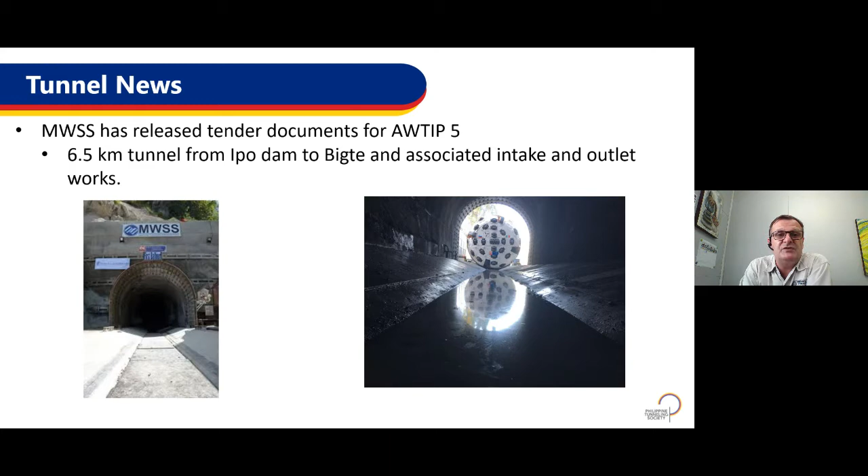So, tunnel news, I have three bits of news. This one is basically the same as last month. MWSS has released tender documents for AWTIP number 5, a 6.5 kilometer tunnel that connects Ipo Dam to Bigte Basin.

Also, there are a couple of phases to be done on the Mega Manila Metro subway project. This is basically the first subway project in the whole of Metro Manila, and the proponent is the Department of Transport. Phase 1 is already out for tender or has been awarded.

There are 4 packages there. The newly released package for tender is CP 104. In addition, there will be another 2 or 5 future packages. The information can be accessed publicly through the DOTR website.

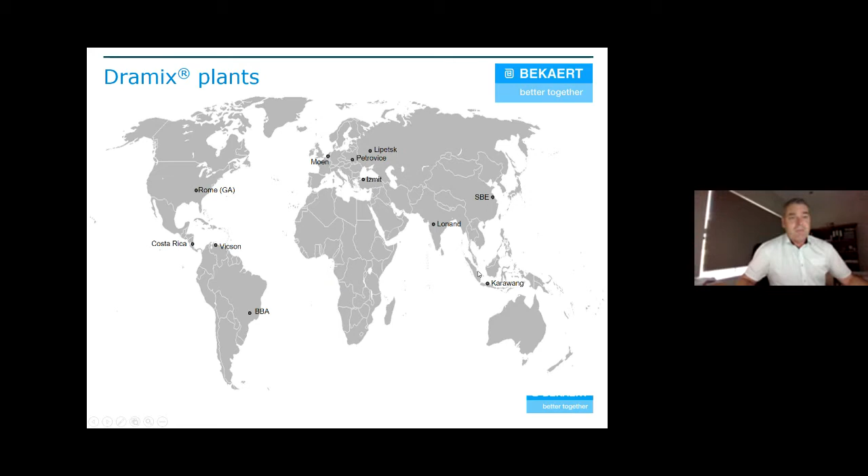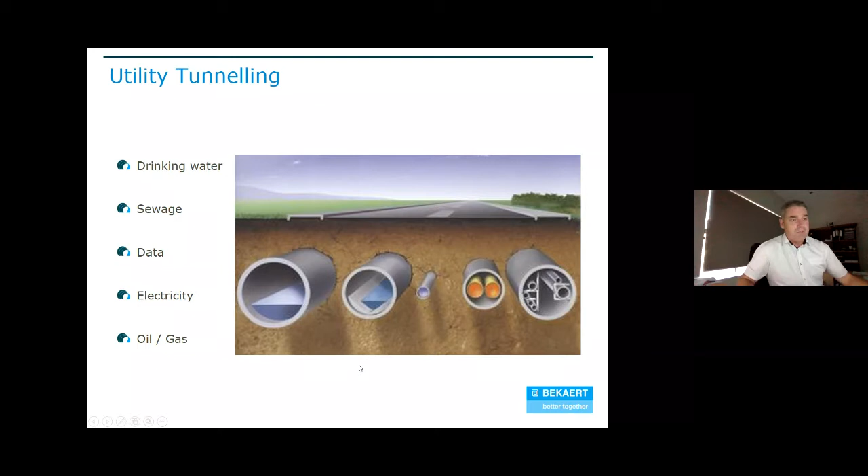I guess for the Philippines, it's basically seen as new technology, but in other parts of the world, especially Oceania, America and the UK, it's a very well-used product in drinking water, sewers, data centers, electrical, oil and gas - all now use fibre reinforced concrete. We also do roads, rails, and what we'll talk about today is metros.

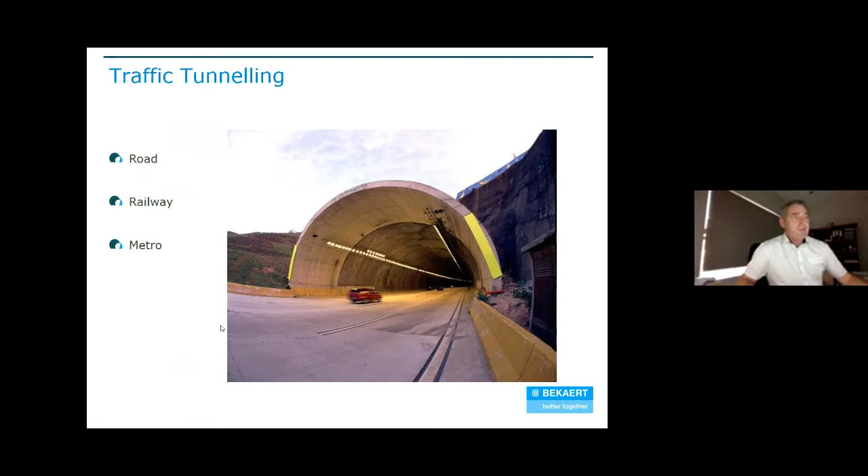Some of you may know there are many different types of fibres - plastic, steel, microfibres. I guess the important point to make is that there's no wrong fibre, just the right fibre for the right application.

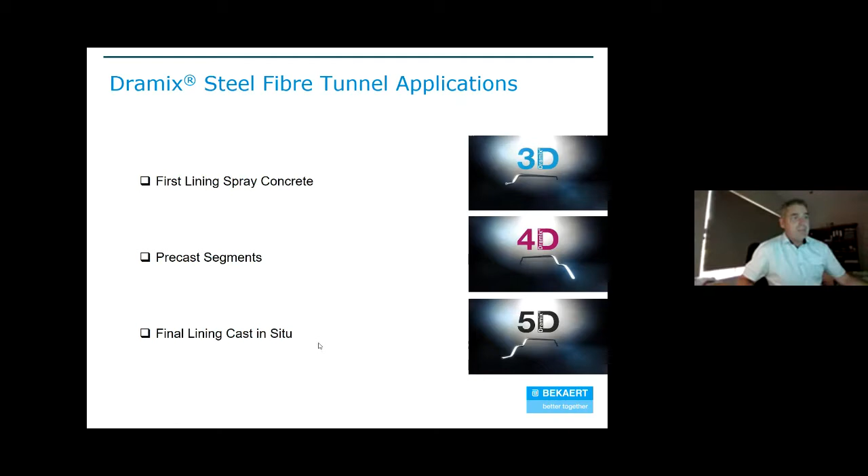For us, this is a little bit of our product range, and we'll talk more in general about the design of steel fibres later on with Gung. We have 3 types of different fibres: our 3D fibre range, our 4D, and our 5D ultra high tensile fibres. I just wanted to show a little video here which gives an understanding of our application and our product, and how it actually works in concrete.

So it's a quick little video.

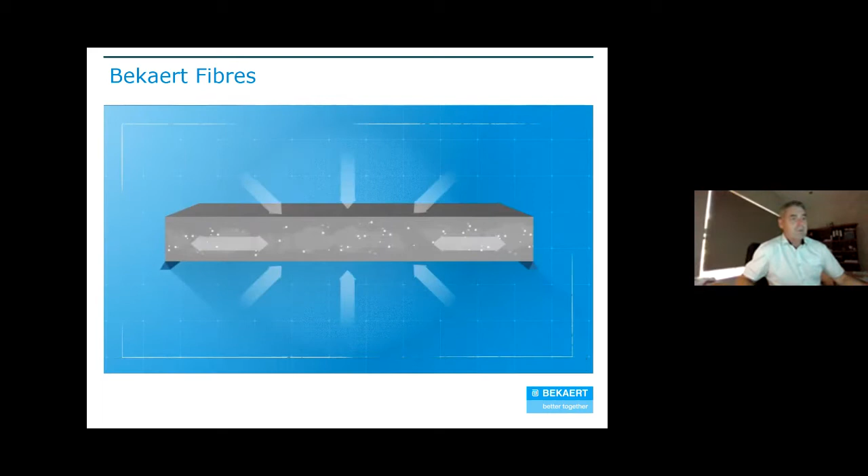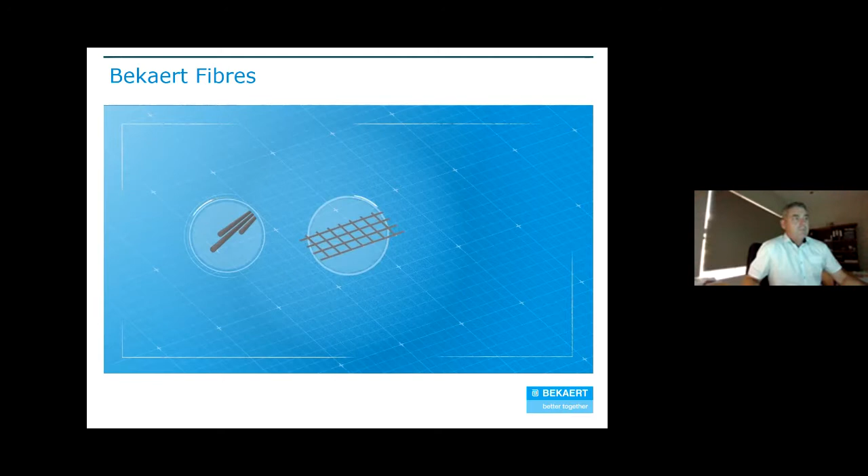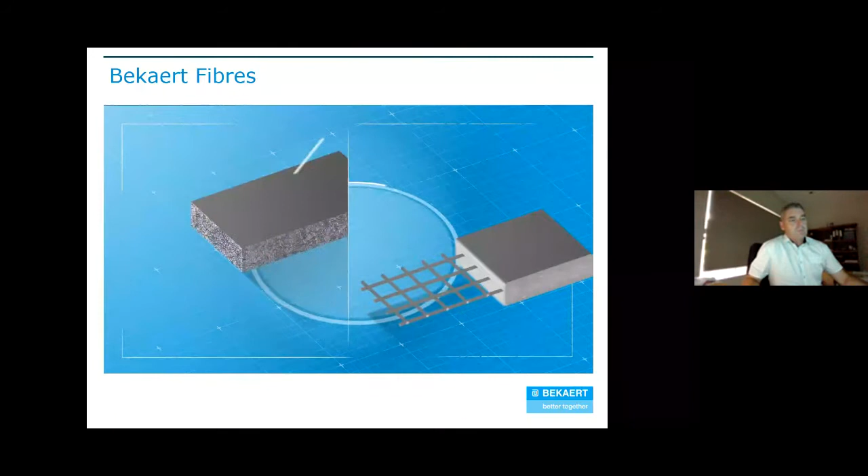Concrete is naturally brittle. Typical stresses like impact, fatigue, and loading lead to cracking and eventual failure. Adding reinforcement to the concrete helps absorb these stresses and limit the formation of cracks, increasing the load-bearing capacity and ductility of the concrete structure. There are several ways of reinforcing concrete. We've all heard about rebar and steel mesh, but did you know steel fiber is just as strong and reliable? Since its introduction over 40 years ago, steel fiber reinforcement has proven its merits in the most demanding structures and applications. The core difference between steel fiber and other reinforcement solutions is that fibers are part of the concrete matrix, turning it into a composite material.

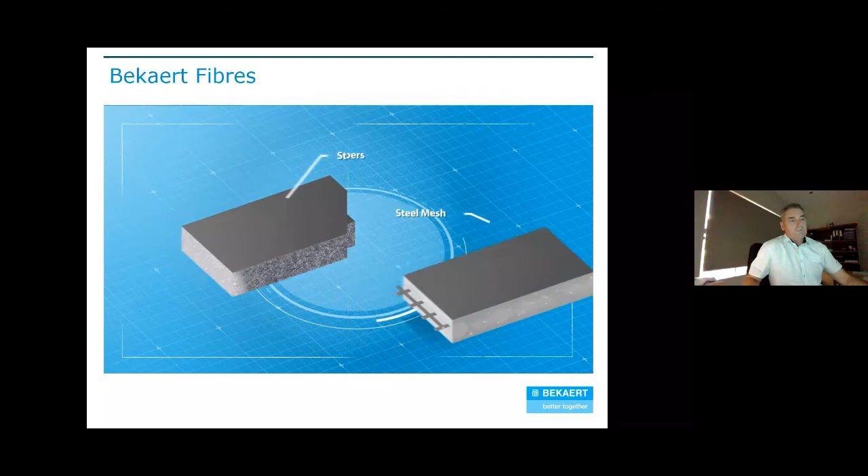Instead of providing strength in distinct locations, steel fibers form a reinforcing network throughout the entire concrete structure, increasing its overall ductility. So how does this translate into concrete behavior?

Take a random concrete structure. When subjected to loading, compressive and tension stresses start to build. Over time, small cracks will appear in places where the stress reaches a critical point.

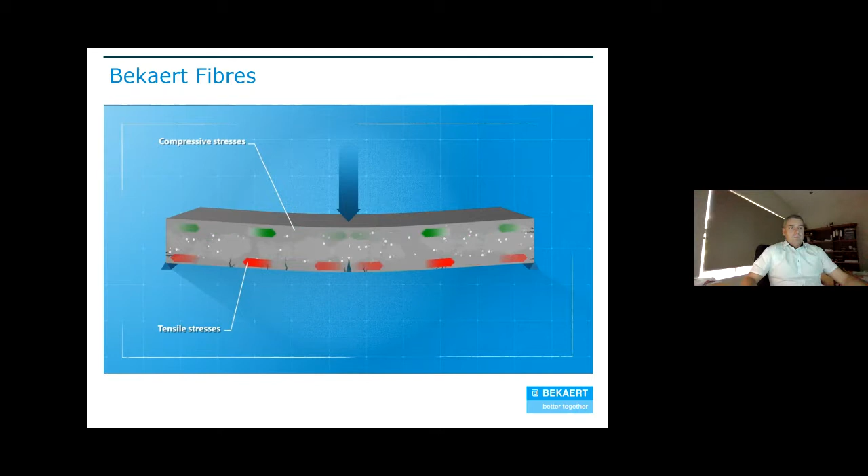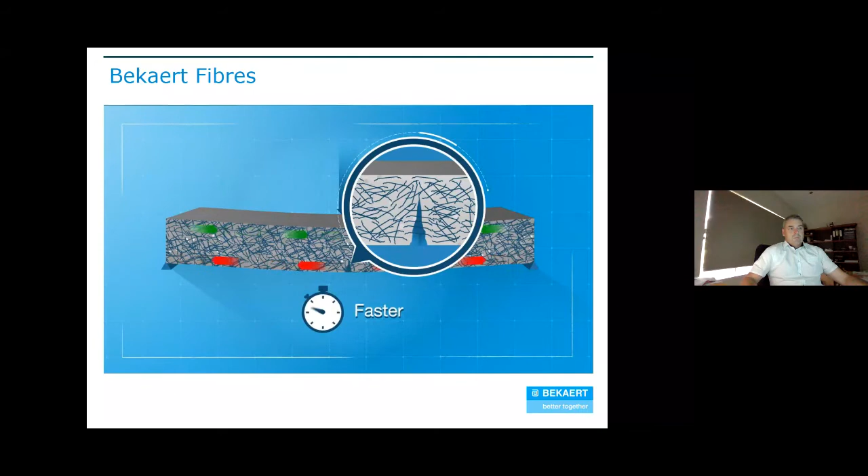Steel fiber interacts within the concrete matrix, absorbing tensile stresses at any point and in any direction. As a result, steel fiber picks up small cracks much faster than traditional reinforcement.

When a crack occurs, the hooked ends of the fibers remain solidly anchored on each side of the crack, acting as a stress transfer media. Once the maximum bond strength with the concrete is reached, the pullout takes full effect. This enables the next fiber to take over, delaying cracks from growing.

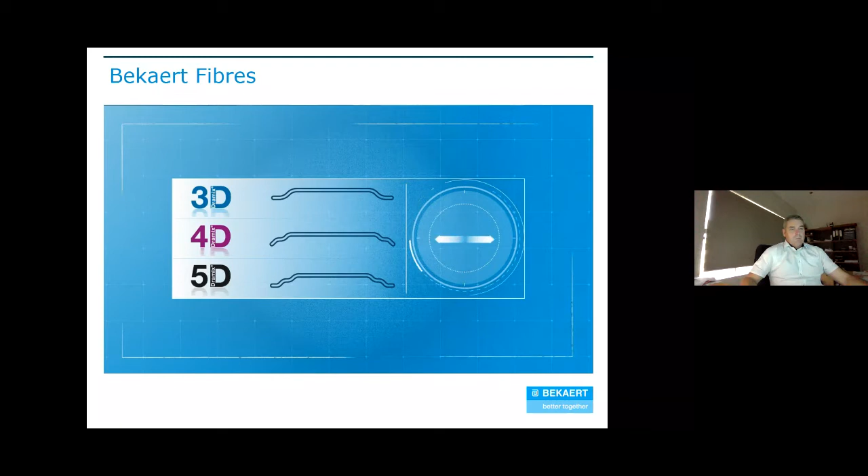Different loads require different steel fibers. To meet any design requirement, Bekaert offers 3 steel fiber types: Dramix 3D, 4D, and 5D. Each fiber has a different hook, strength, and ductility. Consequently, they also behave slightly differently when dealing with stresses.

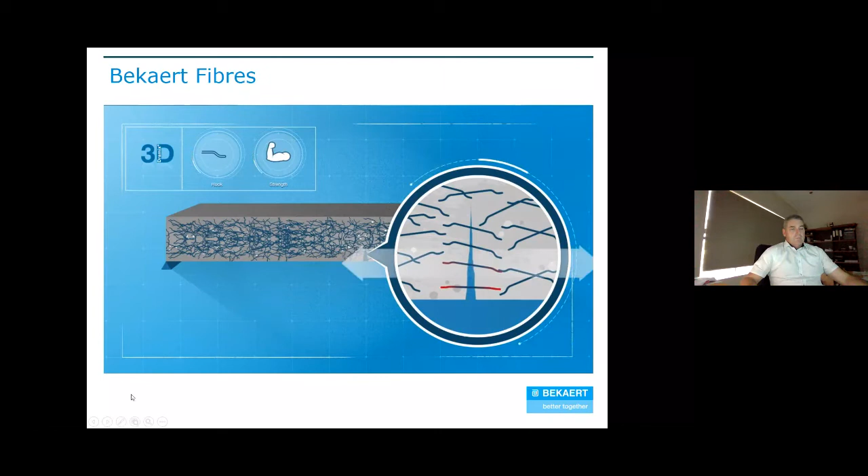Let's take a closer look. First up is Dramix 3D. When a small crack occurs, the 3D hooks firmly anchor inside the concrete matrix. As the stress increases, the hook slowly deforms. As soon as the fiber loses its bond with the concrete, the pullout takes full effect.

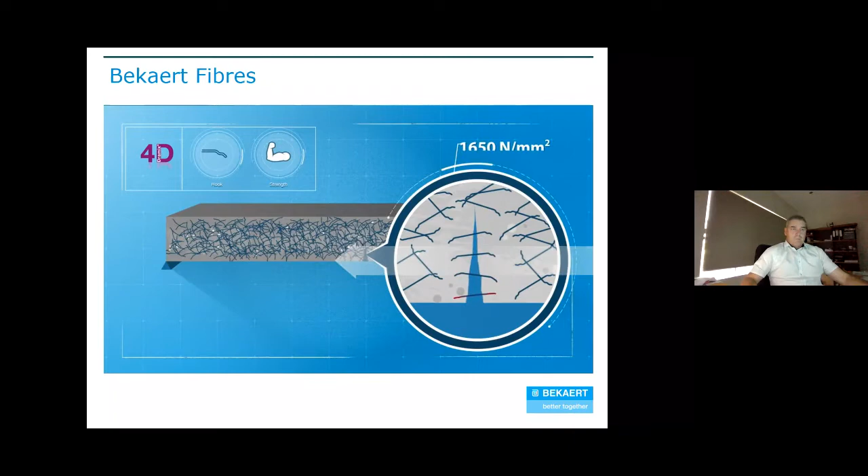Dramix 4D provides the same process, but with even better anchorage and a significantly higher tensile strength of 1,650 Newton per square millimeter or more. Dramix 5D behaves differently altogether.

Here, the hooks never pull out from the concrete. As the stress increases, the wire slowly elongates until it reaches its maximum strength. With a tensile strength of 2,300 Newton per square millimeter and elongation of 6%, concrete structures reinforced with 5D can take high flexural stresses over a long period.

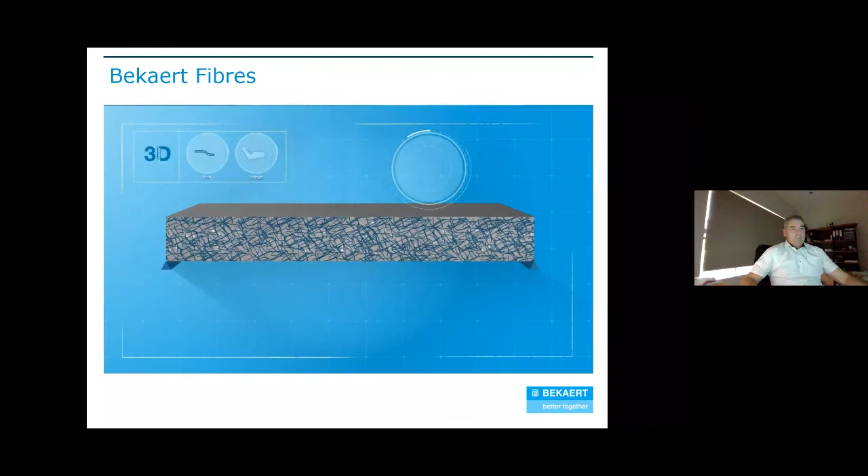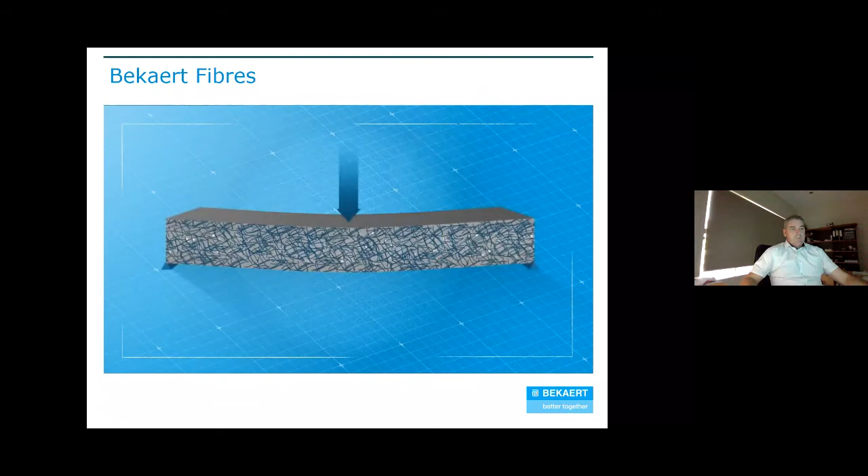Based on these behaviors, we can conclude that Dramix steel fibers effectively increase the load-bearing capacity of concrete. It can be used in almost any concrete structure with or without additional reinforcement, where the ductility of your concrete structure depends on the length-diameter ratio of the fibers and the number of fibers used per cubic meter. It is essential that enough fibers overlap to create a continuous network in the concrete mix.

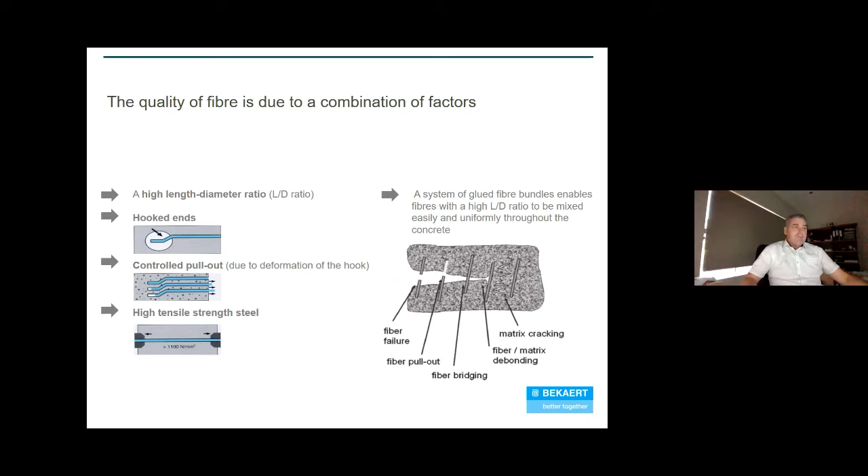And what we're here today to talk about is precast segments and why ultra high strength fibers are a very good application for this.

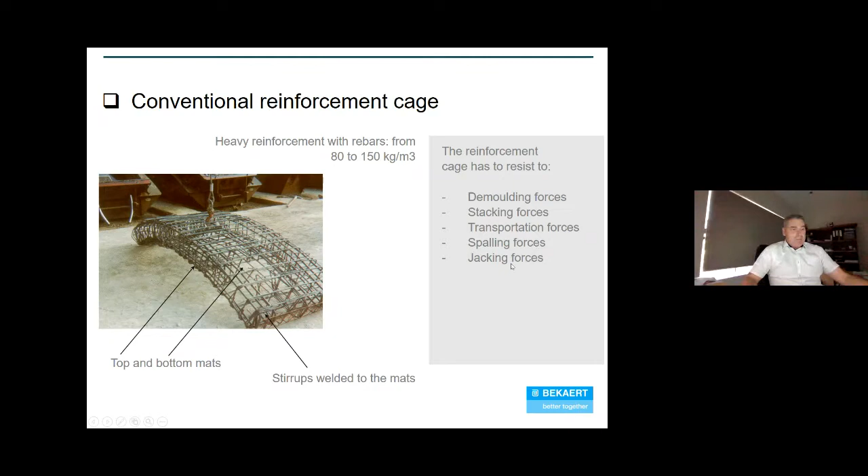I guess a lot of people have seen conventional rebar, heavy reinforcement, 80 to 150 kilos per cubic meter. Demolding forces, stacking forces, transportation, spalling forces, and jacking forces all are accommodated with this type of reinforcement.

I guess the main problems of typical cages is the construction of the cage is very time consuming, very labour intensive. It takes a large amount of space for this operation to happen, and positioning of the cages in the mould is critical to get your quality of the segments.

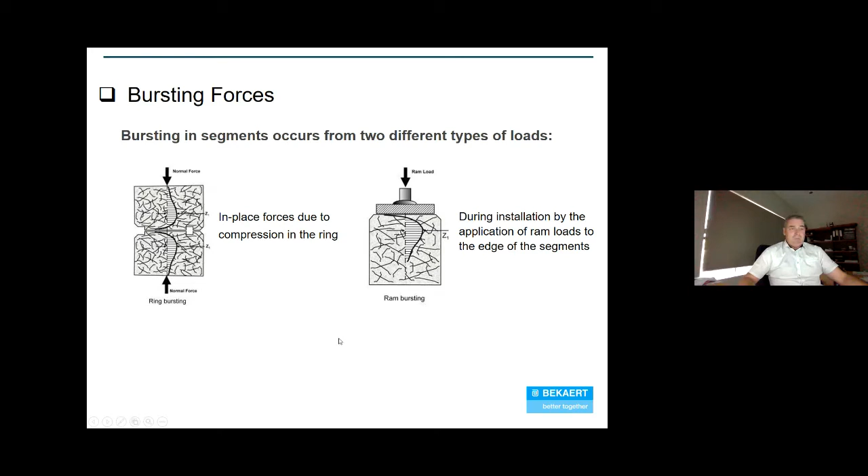I guess with fibre reinforcement, most of these applications can be handled with fibres only, but predominantly the design requirements or design limitations for fibre reinforcement is the bursting of the segments, which occurs in compression and during installation, the ram bursting. In some cases, we can totally remove all the reinforcement, but in other applications, when the bursting forces are too large, we can use a lighter cage in the segment.

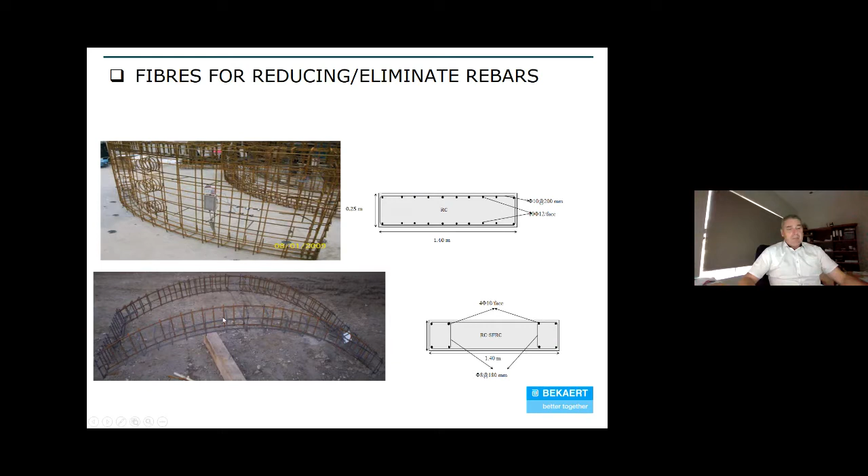I guess the biggest issue we have is the bursting of the unreinforced concrete section, which can affect your long-term durability of your reinforced cage. It's quite expensive to repair, and a lot of cost is involved in that application.

I guess durability is a very big issue, and it's something we address quite commonly. With steel fibres, we don't need the cover that conventional reinforcement needs. We only need 1 to 2 millimetres compared to 30 to 40 millimetres of conventional rebar.

Corrosion of the fibres sometimes happens on the surface, but if you see in our case studies, in most cases we don't see any fibres on the surface at all. And if we do get small cracks lower than 0.25 of a millimetre, we do get a healing effect of the crack and fewer issues. And obviously, if you don't want rusting at all, we can use galvanised fibres, but of course that comes at quite an expense.

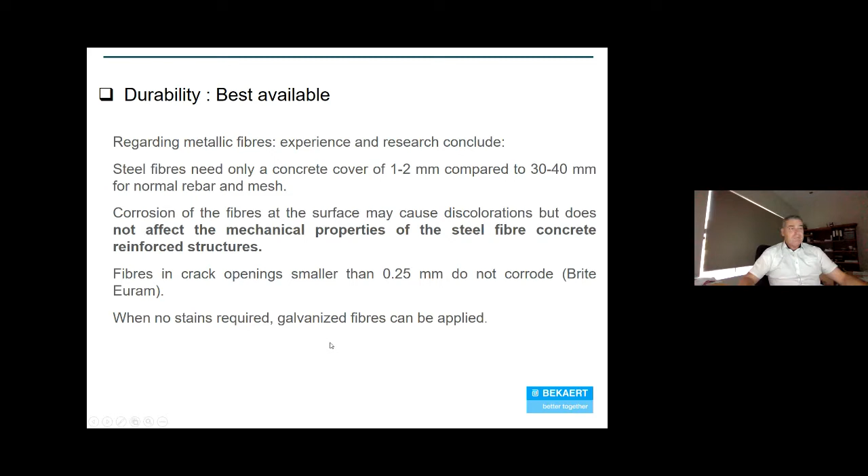So what are the advantages of steel fibre segments? High impact resistance, multi-directional reinforcement, dramatically less damage in demoulding and stripping and moving of the segments, and also installation.

Fire protection certainly helps with micro polypropylene fibres, but not so much with steel. We get increased productivity, time saving, reductions of repair costs and damaged segments, and elimination of storage and positioning of reinforcement cages.

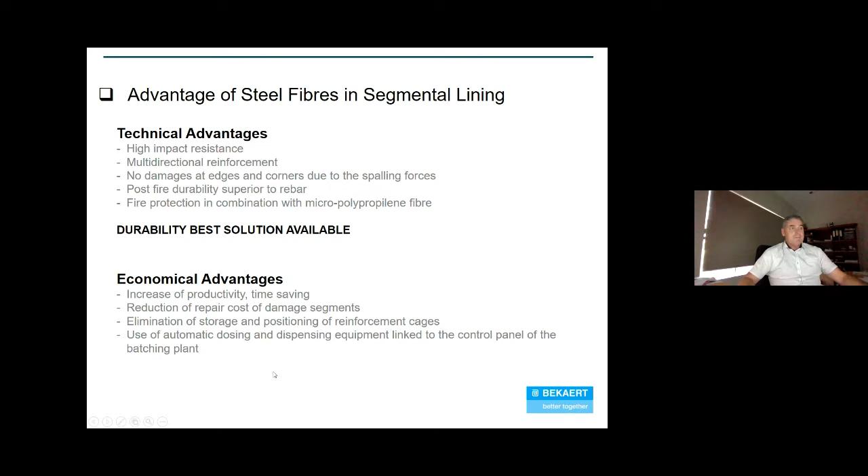I just wanted to touch on this before Jeremy talks about two specific projects. In the Philippines, this is considered new technology, but in other countries we're so much more advanced - certainly in Australia we don't do any segmental line tunnels without fibre reinforcement.

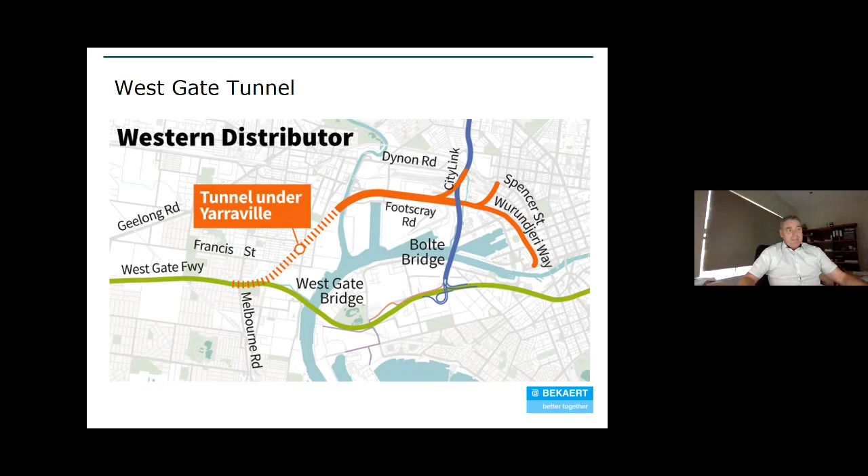And we're now at the cutting edge with the West Gate tunnel, which is basically a 16.6 metre diameter tunnel, 500 thick, using fibre reinforced only solutions.

As we've got a lot to go through, and there's a lot of interesting stuff with the design, I'll just touch quickly on a couple of Asian projects, which is really good to see - in Asia we are now really starting to penetrate with fibre reinforced, and Singapore and Malaysia are certainly leading the way.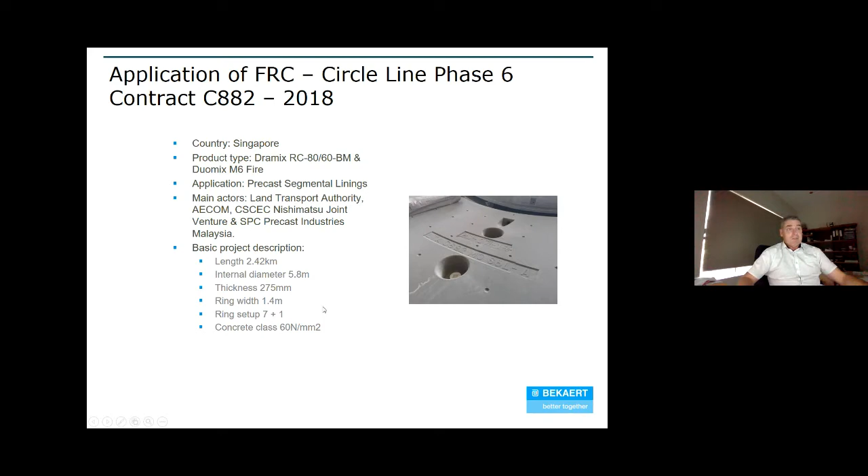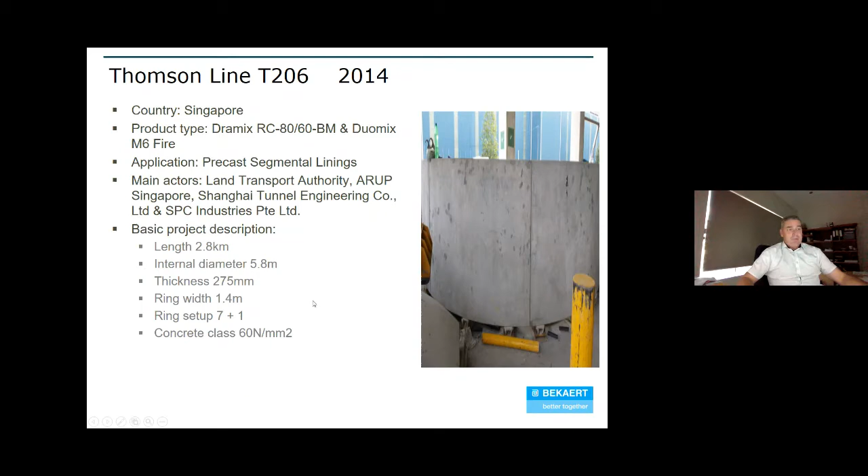Another project is the Thomson Line 2, T206, which was done in 2014 - again a 5.8 metre tunnel. These are just some photos of the segments, and you can see how there's absolutely no fibres visible on the surface in any of the photos shown.

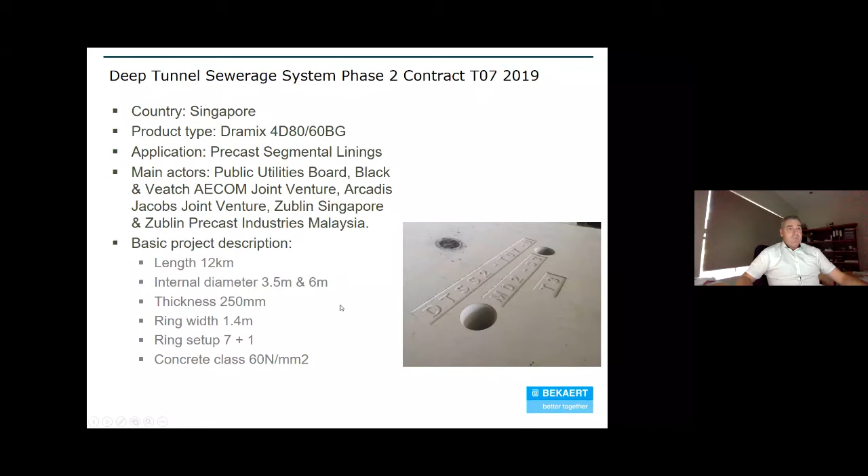A more recent project, which is always really interesting, is a deep sewer tunnel in Singapore, where we're currently supplying 3.5 metre and 6 metre internal diameter segments. Again, you can see very little to no vision of any fibres on the surface. Just a couple more photos from that project.

I just wanted to touch on very quickly - at Bekaert, when we win these projects, we design and install, or help to install, our dosing equipment, which helps distribute our fibres and helps with mixing and distribution of the fibres very well. We offer this service free of charge, and we work with the concrete suppliers and the contractors to install this equipment.

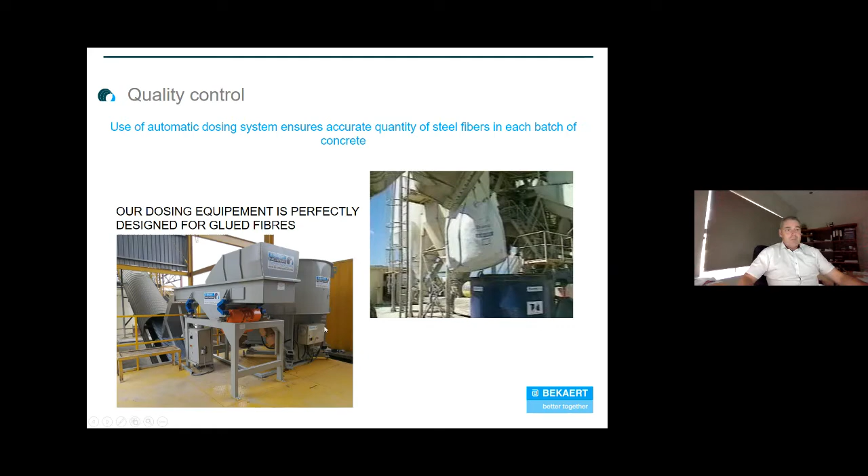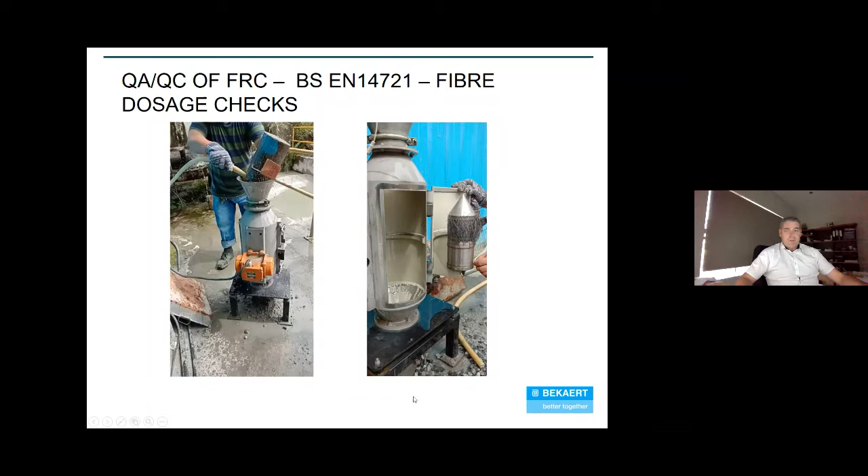On that note, I'll hand over to Gung to continue and discuss our QA/QC of fibre reinforcement, which is really important to ensure engineers and the likes get high performance concrete. Hello everyone - let's start with QA/QC of fibre reinforced concrete.

There are two main QA/QC tests that we do. The first one is fibre dosage checking, as you can see with the equipment here, under the standard BS EN 14721. You pour the wet concrete with fibres into this equipment, and the magnet in the center will catch all the steel fibres, allowing you to easily weigh it and find out the dosage of fibre used. This test takes no more than 15 minutes.

The traditional way of washing by hand will take at least 30 to 40 minutes. Next slide, please.

The second test that we should do on a daily basis is a beam test called BS EN 14651, and this is the setup for the beam test. It's a beam with a notch at the center, and underneath the notch is a crack mouth opening displacement transducer, which measures the opening of the crack mouth. From this test, you will be able to get - next slide, please.

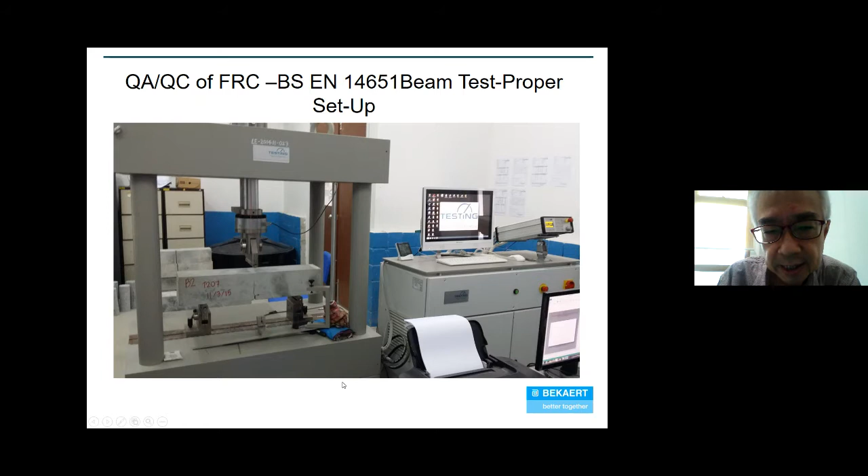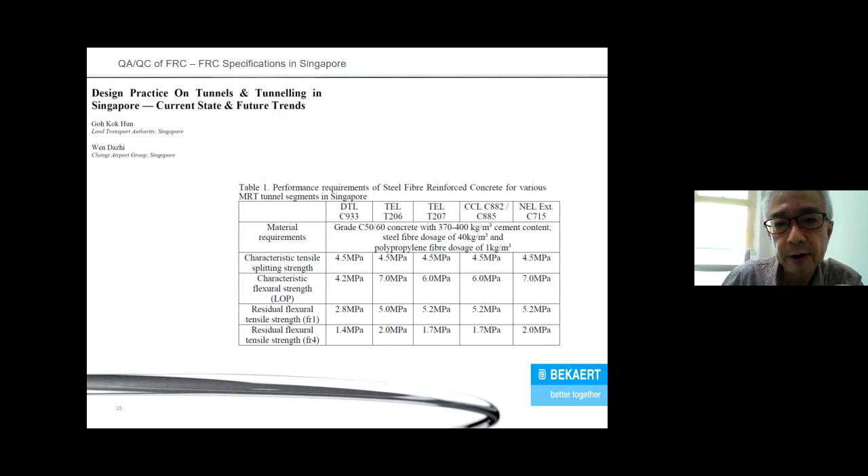From this table, you will see different projects, and you will see the numbers LOP, FR1, and FR4. From the beam test, you will be able to get these values - LOP, FR1, and FR4 - for the different projects we have had in Singapore and Malaysia.

Traditionally, the old way of fiber reinforced concrete is that you only have one value, called a toughness value. That toughness value is easily cheated in a test because it's only one value. This test requires three values from one test, so in this testing, there is no more way to cheat. You can't cheat anything anymore.

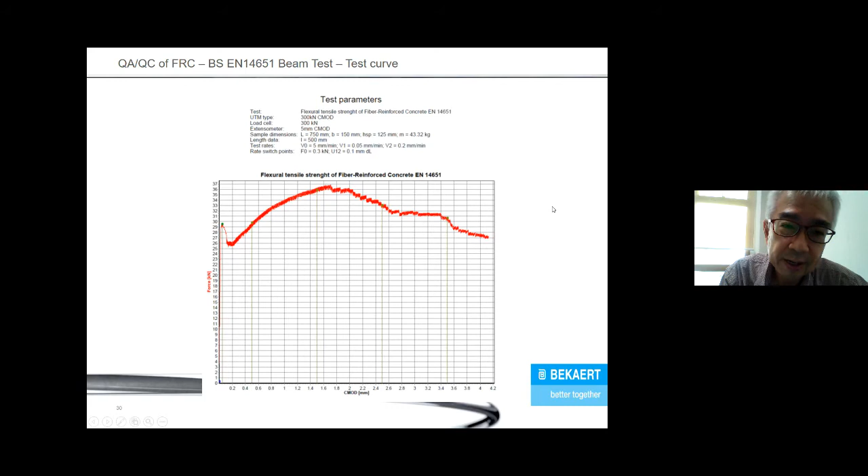The proper equipment to do the beam test should have a rigidity of the loading frame of between 2 to 3 meganewton per millimeter of deformation. We have to ensure that the laboratory has such a rigid loading frame. Without this type of loading frame, we will not be able to do the test properly. In the early days, one of the difficulties was finding loading frames with 2 to 3 meganewton per millimeter, but nowadays these frames are available everywhere.

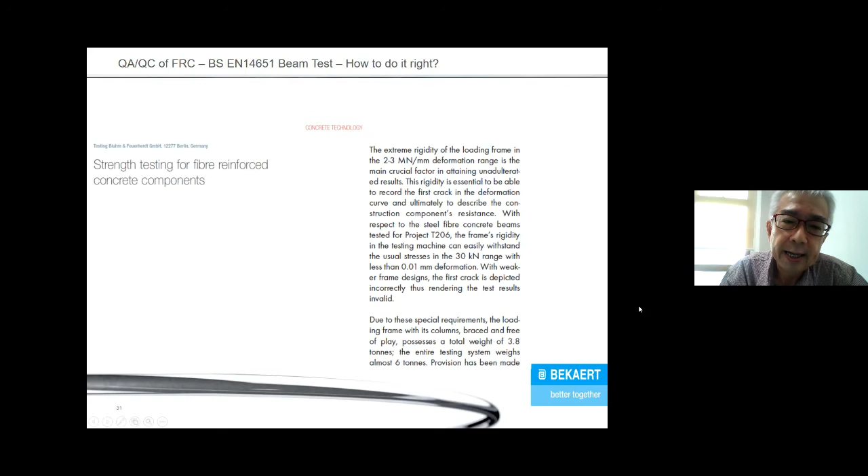So this is a very, very stringent requirement. Why is stringent required? So that the consultants who are using these values for design can sleep well, because if they only test 3 beams or 6 beams, you cannot show repeatability. Why they are doing 3 batches is in order to show repeatability.

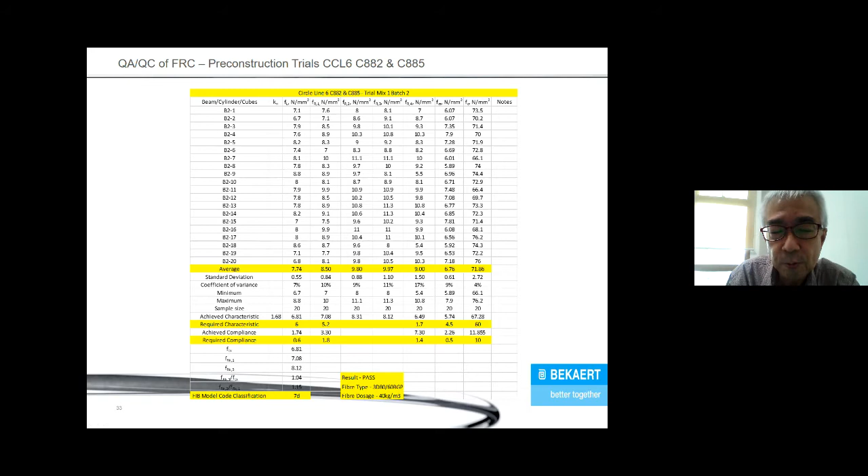So this is batch 2. You can see the values are able to pass every batch, and all beams are passing. So if 1 beam in this batch fails, everything fails. Testing is so important. Before we even start designing, we need to make sure that our laboratories can test and they can pass every day. This mix must pass every day. As long as one of the 20 beams here fails 1 time, it's out.

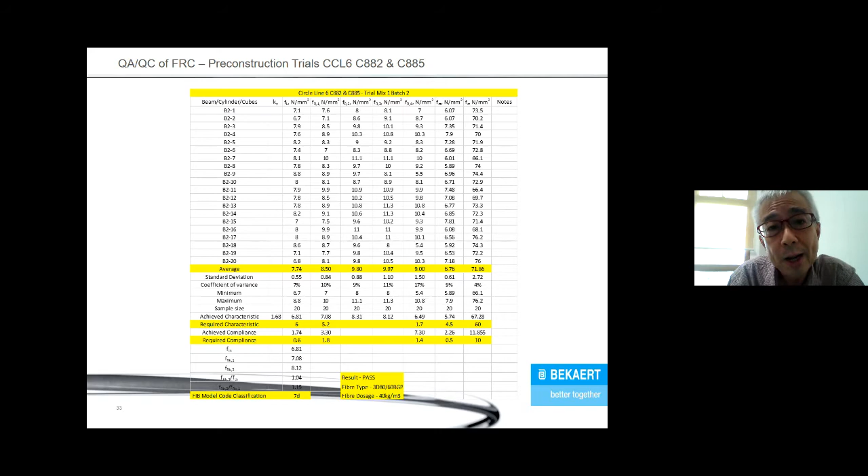So you redo your 20 times 3 sets again, so it's 60 sets. In Singapore, the cost of 1 beam is $1,000. So 20 beams is $20,000 times 3 times is $60,000. That's just for 1 trial mix. Normally, for a project like Metro, you should do at least 2 trial mixes: 1 is daily usage trial mix, 1 is a spare trial mix.

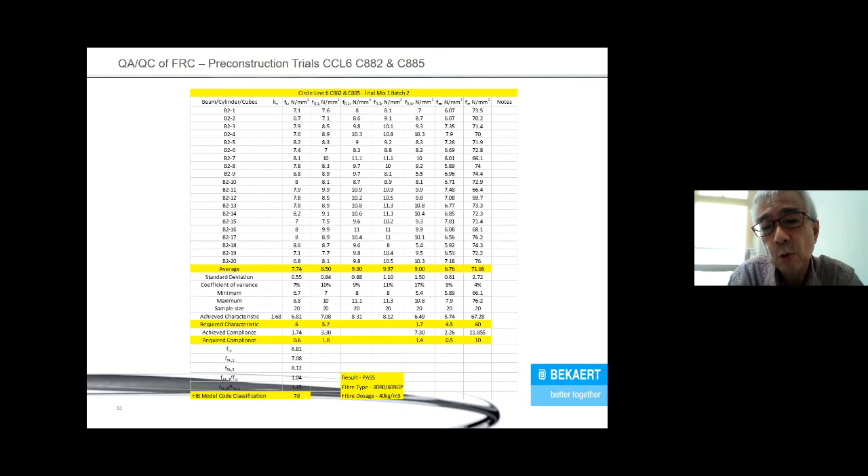So you see, in one project, they have to do 120 beam tests. That's $120,000 down the drain that you have to pay before you even start casting. But it's so important because it gives the designer peace of mind. The consulting engineer who is doing the design can sleep so well after this.

And design-wise, we can go to ACI 544.4R, published in 2018. So nowadays there is a book that you can use for design.

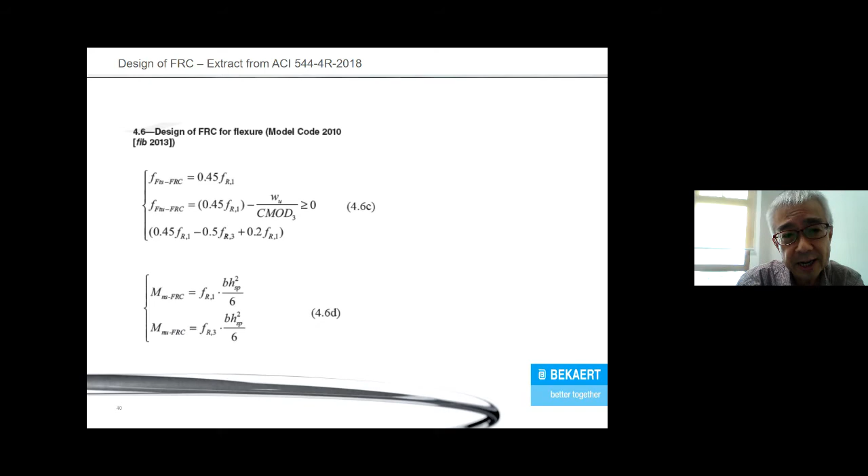Here is an example. Once you know your FR1 and FR3, you are able to calculate your stresses, and then you plug in your values to the moment calculation, and you can calculate your bending moment as well. After this, you compare with your analysis, because you've already analyzed your tunnels. Your analysis will have the analyzed bending moment. You compare this bending moment with your analyzed bending moment. If this one is higher than your analyzed bending moment, you're home free. You're safe.

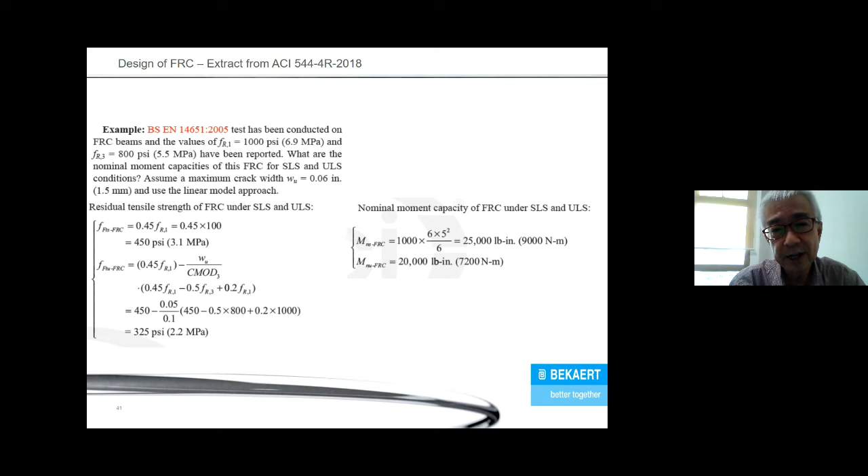And then if you want to use a hybrid segment, that means rebar plus fiber reinforced concrete. ACI 544 allows this as well, because there's a section on hybrid reinforcement bending moment. So the hybrid reinforcement bending moment is bending moment for reinforced concrete plus bending moment for fiber reinforced concrete. So two terms are added together.

So segments in Japan are all designed for this hybrid approach. Fiber concrete is also used in Japan, and because of seismic conditions, they always design segments there to be hybrid. So for Manila, since the Philippines is a seismic zone, you might want to consider hybrid design instead of pure SFRC.

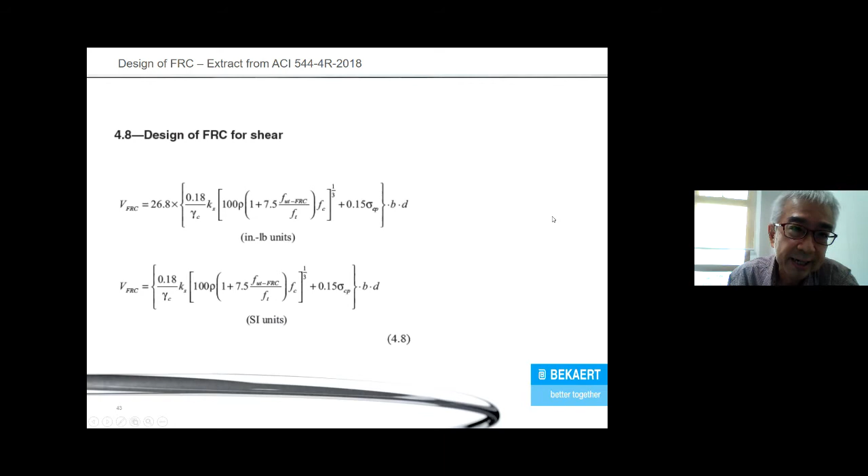Next, please. I think this is the last slide. There are other guidance documents for the design of FRC. The first one is from RILEM, that's European, published in 2000.

But nowadays, most standards or guidance documents use the FIB Model Code 2010. There is also a Swedish standard published in 2014, ACI published in 2016, and as just shown, published in 2018. There is the ITATEC guidance document published in 2016, the British Standard document published in 2016, the FIB Bulletin published in 2017, and ITA Report 22 published in 2019. And in 2020, you will see our Singapore Standard Design of Fiber Concrete Structures being published, I think at the end of this year in December.

And all bending moment calculations in all of these guidance documents shown here use FR1 and FR3 or FR4 in the calculations. These values come from the flexural beam test you saw just now, which is BS EN 14651, whereby you need a good loading frame of between 2 to 3 meganewtons per millimeter to be able to conduct the test properly. And if this test produces inconsistent results, structural engineers cannot produce structurally sound designs. So that's why we want it to be repeatable.

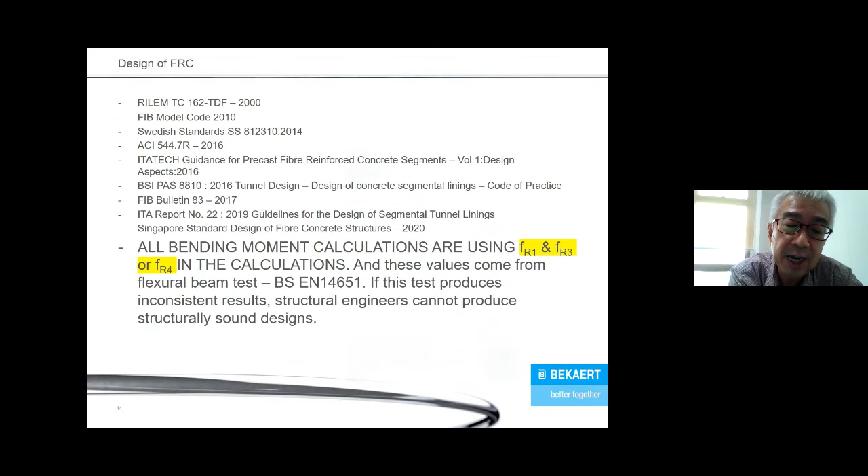And I think the next speaker is Jeremy, and he will take over from here. Thank you very much.

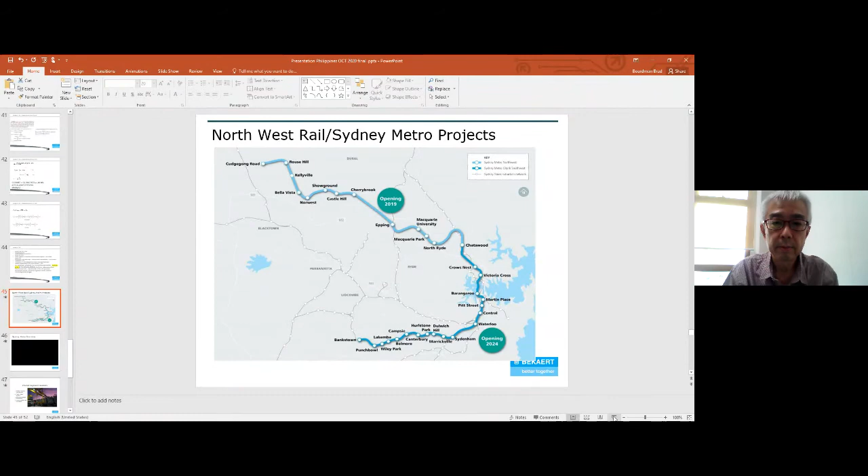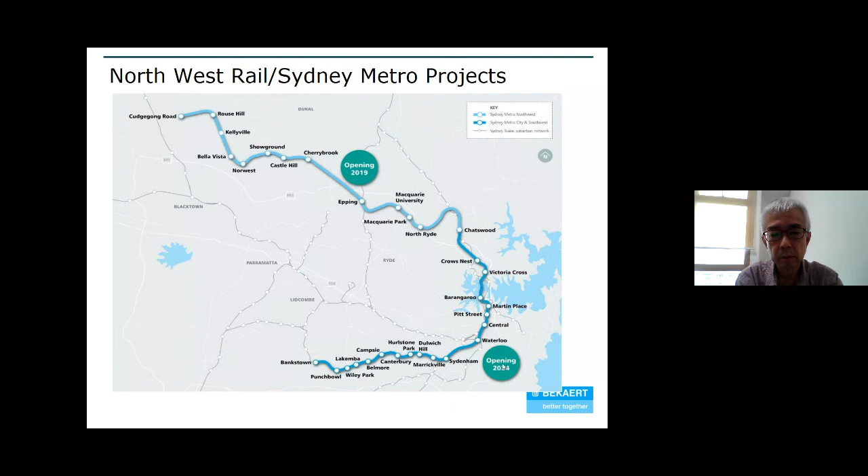Jeremy. Is Jeremy there, Abby? I don't see Jeremy. No, Brad. Abby, well, maybe I can just talk on behalf of Jeremy if you can't get hold of him. Is that okay? Hello, Abby. You're good, Brad. He's logged in as JagCon. Can you see him in there anywhere? He's in there. I think you might just need to release him. It's under JagCon. Abby, give me some guidance here, otherwise I'll just start talking and go through this project. But...

Please, Brad, please start your presentation.

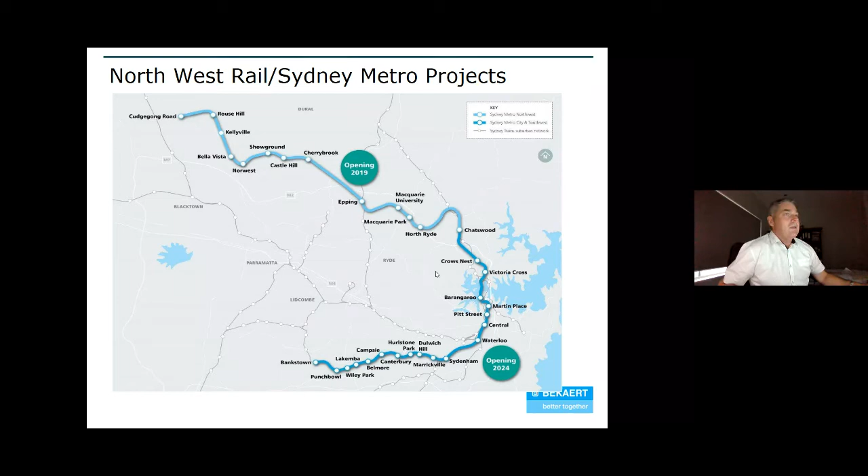Okay, I'm sorry that Jeremy can't get in, but this project is a metro project that started back in 2015 with the Northwest Rail project, which basically went from Rouse Hill into Chatswood. This project uses driverless trains. It is now operational and working, and we're currently under construction from Chatswood through the greater CBD of Sydney and out to Marrickville. The next slide is a quick video just to give an overview, which is interesting because it actually shows the pouring of fibre reinforced concrete segments in the precast factory. Just have a bit of a watch.

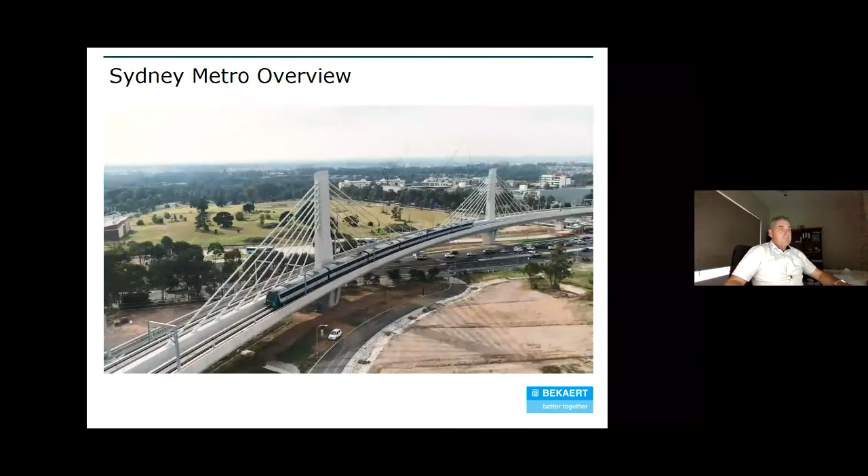Okay Abby, Jeremy just tried to log out and log back in. Can you see him now at all to release him? No, Brad, I can't find Jeremy.

So the important part about this project, and the reason why the contractors like our products so much, is obviously the quality of the segments, the reduced production area, project program and time frame. In a lot of these projects in very built up areas, it's really important for the contractor to come in, produce the segments in an area that can be easily accessed for the tunnel boring machines, and get the production done and out. In Australia our workforce is quite expensive, so reducing the amount of workers in the precast segment factory is very important, because if they can reduce the amount of workers by not using cages, it dramatically reduces their cost structure.

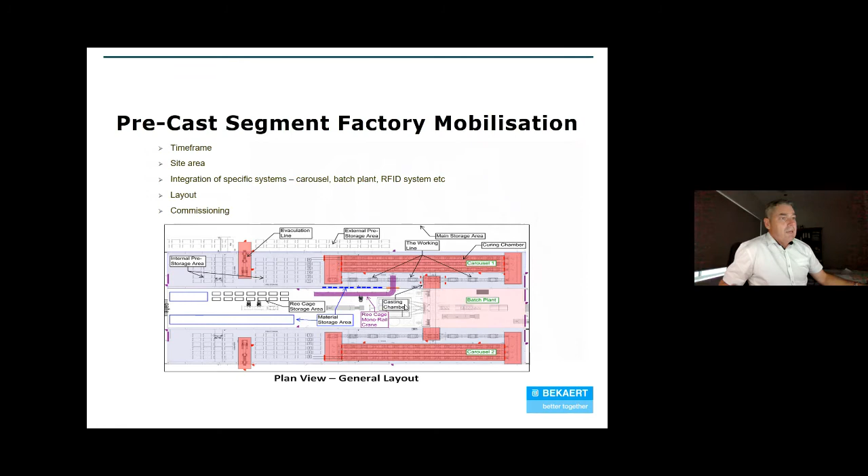This is a picture of the precast factory, I believe, at Kellyville, which is the Northwest Rail project. You can see it's a fairly substantial project, and the main building in the middle is two carousels, one either side, and the centre section is the concrete batch plant that services both sides of the carousel, and the laydown section of the precast plant. I can probably speak for Jeremy that a lot of the work is required in the factory setup and commissioning, ensuring everything works extremely well before you really start mass production.

Some of the learnings there was the time frames were very tight, so sometimes we're producing segments before everything's commissioned and working to its optimum. Like any factory, it's the mindset of the workforce to produce high quality segments, and trying to reduce the turnover of the workforce is incredibly important. There's some incentives there that the contractor gave to the workforce to produce segments of a high quality and in a safe and quick manner.

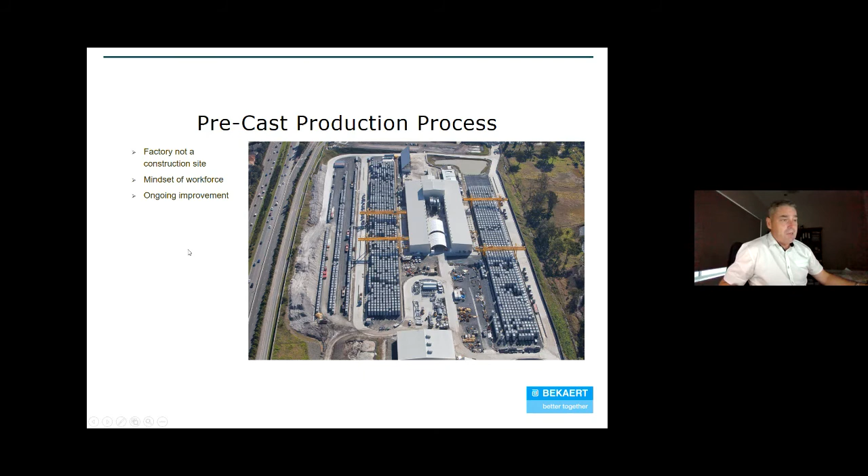You saw in the video how easy it is to cast fibre reinforced concrete, because it's all mixed within the concrete matrix, and it's distributed and vibrated and compacted in one quick and easy process. Then there's a couple of finishing stations, and then it goes into a curing chamber. You also saw there's barcoded quality control, QA/QC, which is also very important for the contractor and the client as well.

Just some lessons learnt. The water cement ratio is very important for the overall strength of the concrete. The moisture control is key in the concrete batch plant, because we're talking about very low slump concrete. In this case it was about 20 or 30 slumps, so very dry concrete. So it's really important that water cement ratio and moisture control is very much controlled.

CCTV footage and PA systems is obviously for safety, because there's a lot of moving parts in the carousel, and for the contractor the safety of their workers was paramount. Certainly in Australia that's of the utmost importance. Also the layout of the factory and the yards was designed to limit the movement of the segments and potential damage to them. So a lot of thought process had gone into it, from Northwest Rail into the Sydney Metro project that is now all but complete.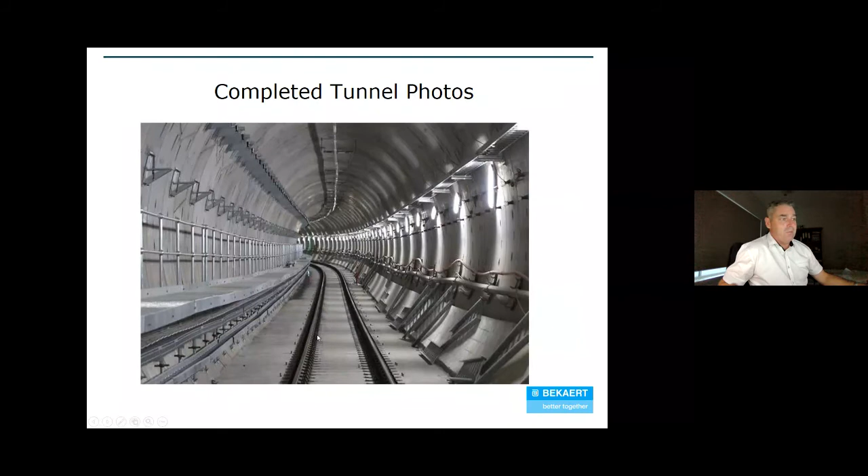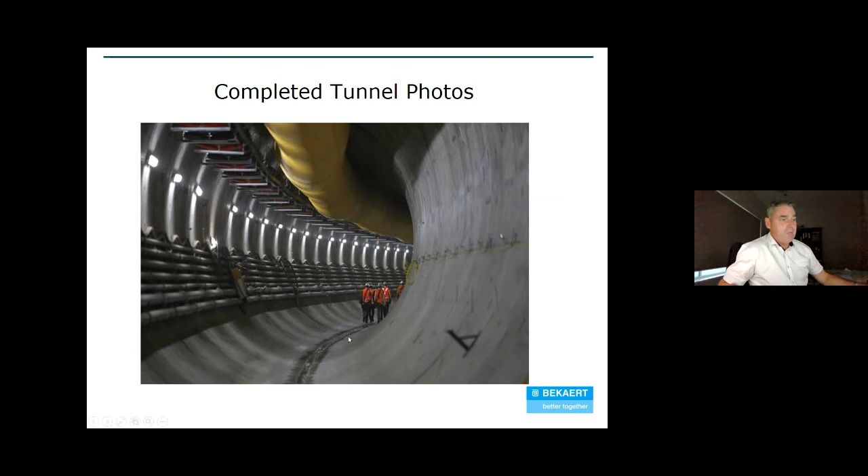That's just the completed tunnel. As I said, Northwest Rail has been in operation now, the first stage has been operational for a good 12 months, and everything's working exceptionally well. And just another photo of this completed tunnel before the tracks and track work has gone in.